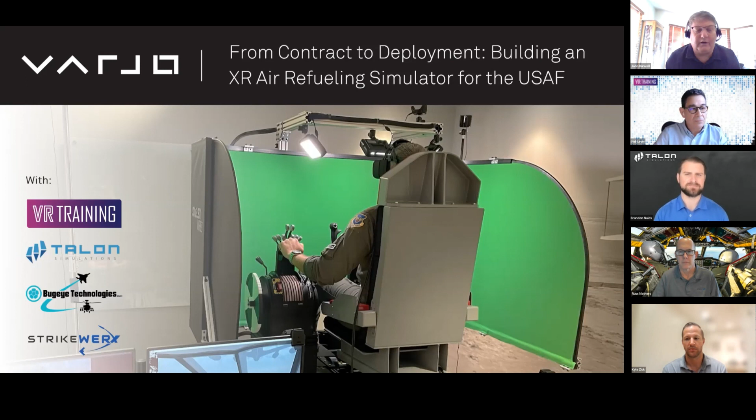A quick slide on Varjo. I think a lot of you are familiar with us, but for those that aren't, our focus at Varjo is really building enterprise class headsets that support human eye resolution, that support the ability to see details and objects at realistic visibility ranges within the headsets. We really have a focus on mixed reality solutions using video see-through technologies and a lot of software that we've developed that help to mix that video see-through technology with the virtual environment, the computer-generated content. I think you'll really see that today, how those tools were used and how it was implemented in building a real simulator. I think that's going to be the power of what you'll see today.

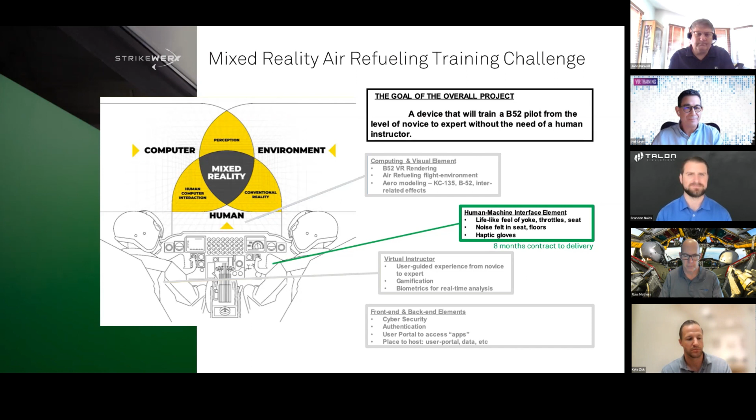Thanks, Russ. Challenges are like SBIRs, but SBIRs tend to be the effort of a single company. The problems and requirements of a challenge like this call for technical solutions that cover many, many disciplines.

As such, teaming is a super important part of the process. I knew that we couldn't architect a solution to the Strikewerx challenge without the input and effort from a team of small, like-minded companies. So I reached out to a few that I knew or had worked with before to help craft our solution. I was fortunate to be able to bring a great group together. They included Talon Simulations, Bugeye Technologies, Magic Bytes, Iris Dynamics, Silverdraft Computing, and of course, our host, Varjo.

As a small company, I know that I'll be going up against these large companies that may already be familiar to the sponsor with lots of capabilities. I've learned that we need to separate ourselves from the crowd by proposing unique solutions, usually outside the norm.

In this case, our solution was focused on providing a realistic experience and high fidelity simulation for the pilots. The hardware had to have the exact look and feel of the B-52 components. The simulator had to behave the same as the real B-52. Controls had to provide the same performance. And as a nod to the mixed reality requirements, we wanted to see real hands and arms on the throttle and yoke during the procedures.

So our focus was on these key elements: exact duplicates of the B-52 hardware, a multi-use platform and component engineering from Bugeye, electromagnetic actuators from Iris Dynamics that could provide smooth, powerful control loading, full motion 3-DOF platform from Talon, who were also responsible for much of the R&D and the actual assembly of the simulator in Orlando.

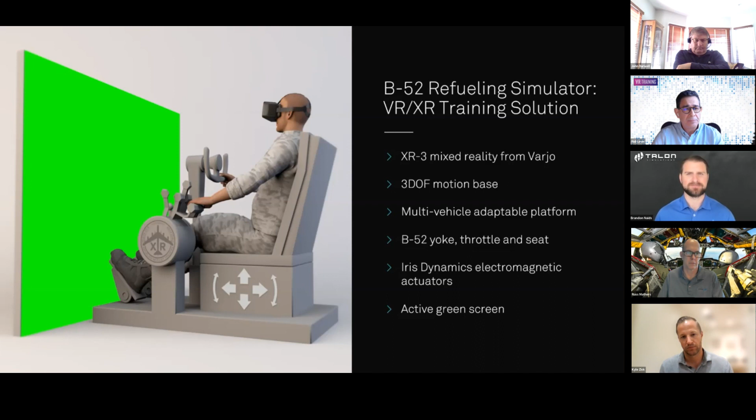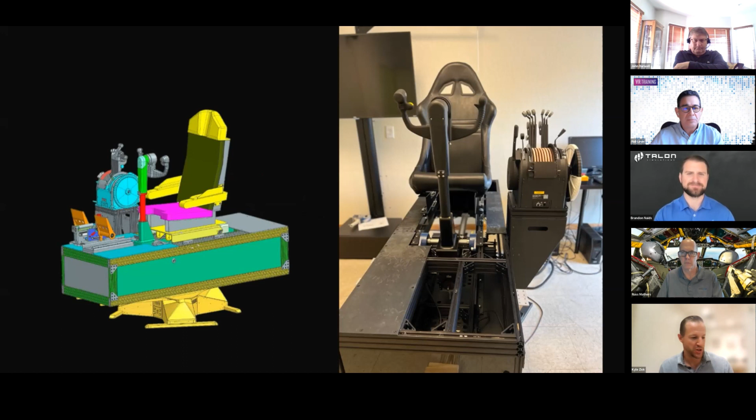Bugeye was already looped in from the start, but once we signed a contract, my first call was to Kyle. And I appreciate that call, Neil. Yeah, Neil called us and we started diving into this.

And you know, the biggest thing that we focused on up front in a project like this is to start with the pilots, start with the end users, try to pick their brains about what's important to them, what's going to make the training effective. And so we were lucky in this case because Russ and his team gave us great access to a great group of pilots that gave us all kinds of information.

And gathering information is really where we had to start. So between picking the brains of the pilots, going and getting in a B-52 and scanning, collecting more data in the B-52, and then also using some flight manuals - those are the main avenues for collecting data that we have at our disposal. There was initial talk about using an existing model, and really what we determined is that's just not adequate. You really need to combine all those data collection avenues together to get a full and accurate picture of what this simulator needs to do.

So when we sent a team of engineers down, we sent them with our laser scanner, a very high fidelity laser scanner, and they went in the cockpit and scanned every inch of that B-52 cockpit that they could to get accurate detail on every little piece.

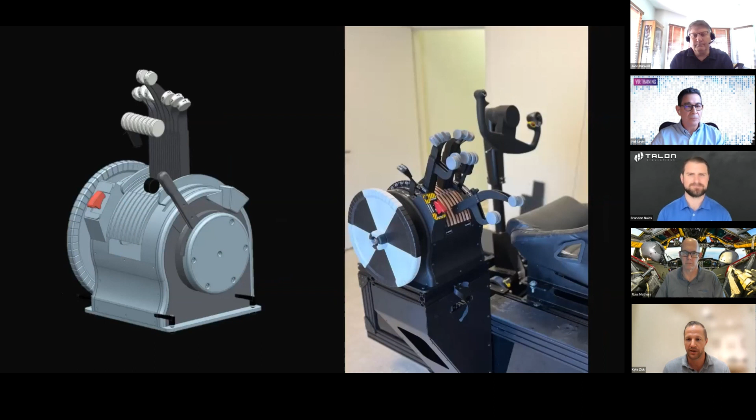To go into a detailed example, the throttle in particular is a really important piece, as was evident by the pilot interactions that we had up front. We had an interesting engineering challenge on the throttle where, in the real aircraft, there's 8 engines, 8 levers that you see there. But in the real aircraft, these levers are connected to cables, and those cables run hundreds of feet back to the back of the aircraft.

Those cables actually go out to the wings and control the flight surfaces. Trying to reverse engineer that system and put it into this package that you see here on the screen, which is basically a cubic foot, and trying to replicate those forces and the feel of that, again, is a very interesting engineering challenge.

We identified pretty early on that this complex throttle was going to be kind of the long pole in the tent for us from the hardware perspective. We were going to really have to focus on this and get it right, but also it was going to be a challenge from a scheduling standpoint.

Everybody's going to be wanting to get hardware in their hands and get it working. So we knew we had to move quickly, and our engineers ultimately did a great job getting those forces crammed into this little package that you see here, and a lot of the pilots, once they finally saw it, were just in awe of what we came up with on this throttle. So it ended up being a pretty good success story, but not without some hurdles along the way.

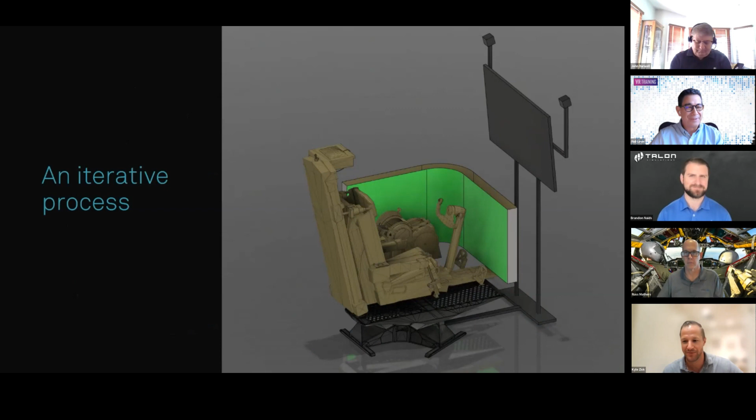Thanks, Kyle. Glad you answered the call.

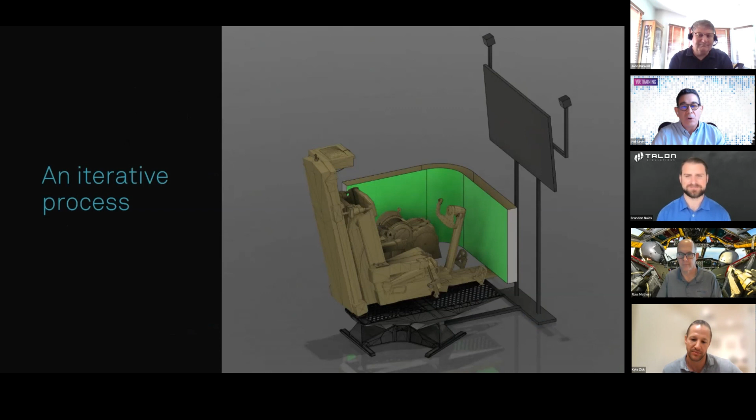This challenge began with 103 companies submitting solutions. Within a month, there was a down select to 25 companies, and then they wanted more detail from us at that point. The next round had a 10-minute video pitch, along with a 20-minute Q&A with the sponsors and the chief scientist from Global Strike.

And this was our first drawing that we supplied for that pitch. We signed our contract in early December, as Russ said, and we had 8 months to deliver the prototype. After we signed the contract, we began ordering all the new equipment, filling in the details of the effort, and planning the next steps. Once Bugeye's new scan was done, we had a VR cockpit that we could work with.

I love this picture from February 2nd. We're already 2 months into our build, and it's the start of our real R&D work. Jordan from Talon and Thomas from Magic Bytes began working on our initial prototype with COTS components. You can see here that we're using a rudimentary backlit screen, and the focus at this stage was building familiarity with the XR-3 headset to see hands and equipment inside the VR flight sim software.

Since this was the beginning of the project, we knew there was design and manufacturing of the hardware, and it would take a few months. So we focused on becoming familiar with the XR-3 and Varjo lab tools so we could understand what we could accomplish with the tools and the limitations within the flight simulator environment and chroma key.

With the goal of including the physical force feedback controls and your real hands within the virtual cockpit, we knew that we were going to have to use a green screen around the yoke and throttle, and we're going to learn how to create masks for that specific area with lab tools. And because there was no other interaction with other instruments for this application, we knew that our main focus was your hands and the yoke and throttle.

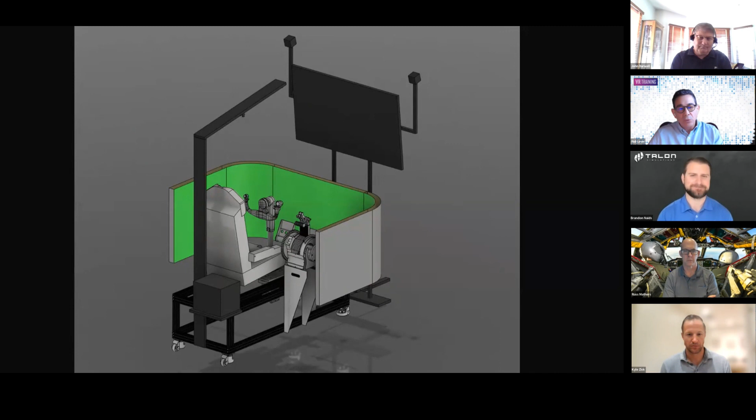The lighting array has now become this larger overhead panel because of all the lights we needed. We have 3 LED lights and 2 more spotlights to cover the lower side areas. We still don't have a solution about how they're going to be mounted yet. We're still gauging the size of the green screen. And so all those lights are a perfect example of over-engineering on our part, deliberate, or even delaying what our final solution was, until we move forward, later refining it on down the road.

By this point, we've received the bulk of the hardware from Bugeye, and we're ready to start stress testing our design.

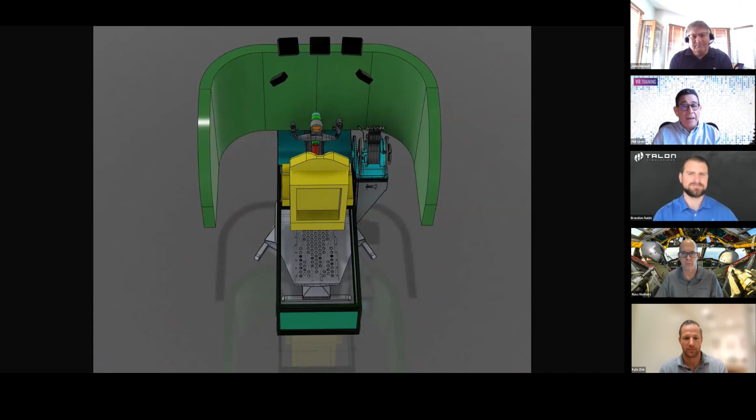One of the requirements of the challenge was that the simulator has to work for both the pilot and the co-pilot. From this drawing, you can see that our final positions for the lighting were above the pilot, but the boom construction still wasn't finalized.

The dimensions and shape of the green screen are final. The simulator has to work for both the pilot and the co-pilot with relocatable throttle quadrant, so the screen has to be of equal shape on both sides. And in this particular view, we're looking at the left-hand seat, the pilot.

And one of my questions to Russ, one of our questions to Russ, was: well, how are you going to get into the simulator at this point? And will 22 inches really make it work? And we told Neil that, yeah, 22 inches does work. You see behind me, the cockpit environment, you can see that throttle right there in the middle.

It's a common throttle used by both the pilot and co-pilot, so he's got to reconfigure it. But that 22 inches does allow the pilot who's used to getting in by grabbing a handle back here, right above the window, to grab that, stand on the seat cushion, and perform some gyrations to slide into that seat. So they're accustomed to that, and Neil's solution is satisfactory.

At this point, we decided to work with an outside engineer to evaluate materials for the screen and settled on a custom plastic screen that was light enough to be mounted on the motion platform.

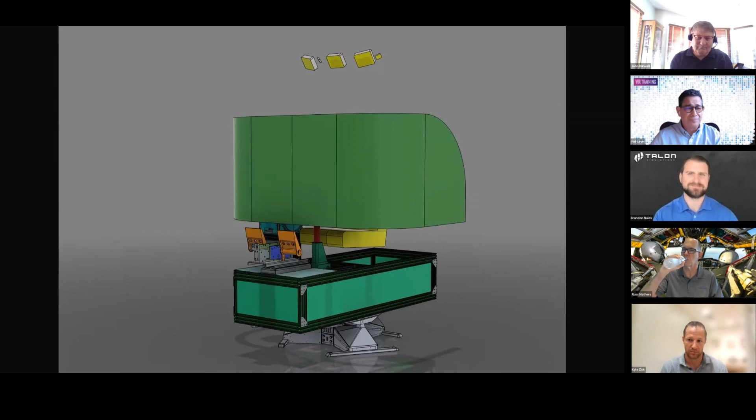We actually were kind of aware that might be a problem, and were able to make some quick design changes to the green screen frame. You've got the aluminum frame, then the green screen itself is acrylic with green screen fabric on it. We had to cut out this notch and ended up making plenty of space for it. So that's just one of the fun engineering challenges we encountered along the way.

The next step at this point was making sure we got all of the hardware integrated with the software. We had a software engineer on site helping with that. We had to make sure we got all of the inputs from the throttle and yoke communicating with the program, which was developed in Unity in this case, as well as the outputs.

Because you needed to have control of the actuators. For the yoke, it had a pitch, which was forward and back force, and roll left and right. So that needed to all be communicating properly, as well as the output of the motion profile to the platform. Those were all of the main components that we needed the software integration for.

We began fine-tuning more of the settings in Varjo Lab Tools for the green screen and making sure all of that was at least at a specific default area that we knew we might change on site, but at least gave us a good place to start based off of this lighting setup.

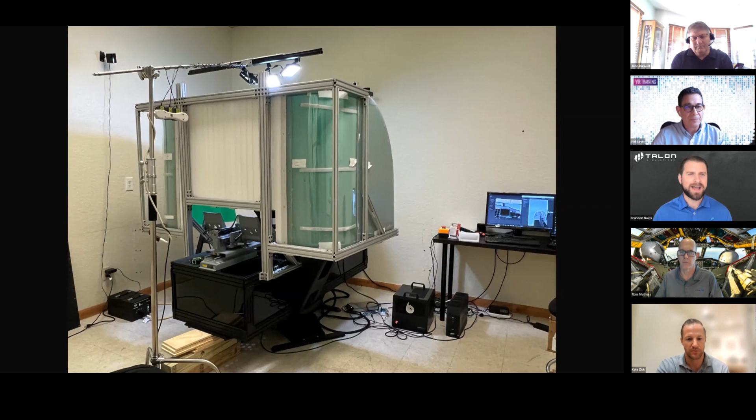Then, once everything was kind of working and tested, we were going to begin doing wire management. We wanted to leave open the cockpit where we were going to house everything until we knew it was all working. We were able to get things sorted out and make sure it's easy for maintenance and troubleshooting, which is one of the nice perks of the 80/20 cockpit.

So everything's housed below. We had a power supply for both of the electromagnetic actuators, and they use electricity to power the magnets, which make it a lot smoother of control loading. That was one of the benefits of using those, and what set us apart.

Such a critical aspect of air refueling is battling with those 35 to 40 pounds of force in the yoke. Those had a control board as well that needed to communicate the input and outputs. The yoke and throttle each had a needed power and data transfer to the computer.

And then even the seat had 3 actuators, because they are controlled just like in the real plane to move up and down, forward and back, and tilt forward and back.

As you see here, one of the other big aspects once we started were the armrests that we found cumbersome. We asked Russ, hey, this is a little cumbersome, what do you think, do we need these? I told them it's essential, because you've got to recreate that cumbersome feeling that the pilots have.

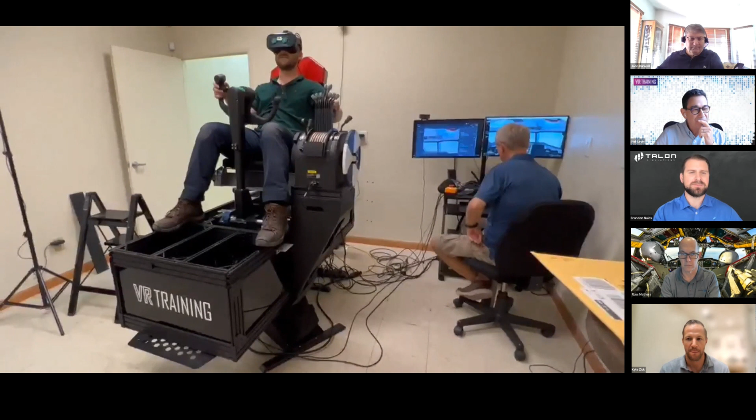So the motion communicates in real time with the Unity engine through a plugin that's processed through middleware software that translates that data into the 3 degrees of freedom of the motion. So you have pitch forward and back, roll left and right, and heave up and down. And we can actually tune those each independently of each other, depending on what forces are going to be stronger or less powerful in the aircraft.

We ended up tuning it to where we thought might be realistic, but then once we got some pilots on it, it got tuned down quite a bit more. Really your body just feels the onset acceleration cues, so you really just need a little bit of motion here and there, especially when you're air refueling, where your goal is to remain in steady level flight. So you're not moving around too much, but this was where we started, and we were able to fine tune all of that in real time with the pilots.

Our team did their share of QA in Orlando without the final screen. There was a lot of work going on as we integrated all the different components. But now it's time for the last set of testing.

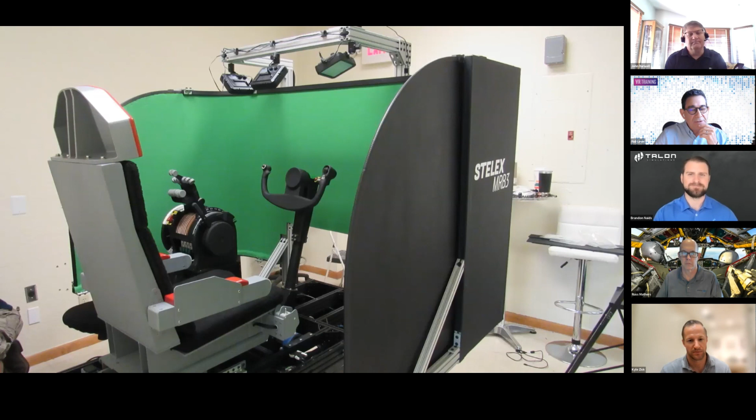This is July 26th, we're 7 months in. We're almost done, just days left to go before we have to pack it all up. The final screen is finally mounted on the 80/20 aluminum frame, and it's covered in a black skin. That same frame supports the light array, now down to only 3 lights, and strong enough to serve as the handhold for the pilots entering the simulator. We've got less than a week at this point before the simulator has to ship out.

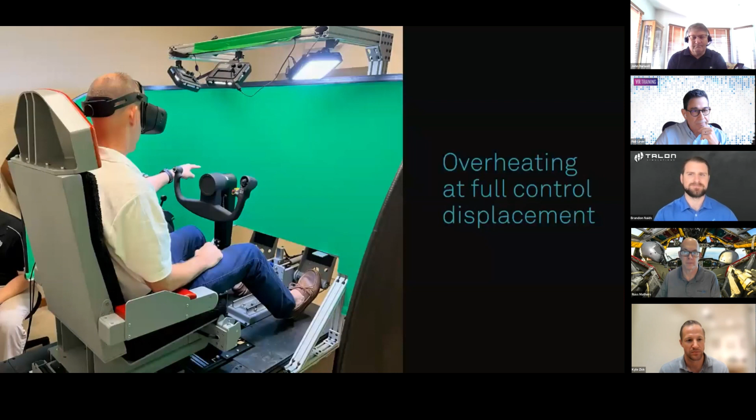And so the first day with Russ testing resulted in an issue of overheating of the actuators. We found that during normal air refueling, it's possible to end up holding the yoke at full rotation for a period of time. That led the actuators to be holding that amount of force, up to 40 pounds, longer than expected. And it overheated the actuators to a point that they faulted.

They cut off power to protect the actuators. We didn't really expect to max them out to that level, but we knew that we could apply active cooling to them. If you cool them down, we could increase that continuous power output 3 times compared to without the cooling. We were able to grab a fan that we had in our warehouse, the ones we actually use for our race car and roller coaster simulators to blow wind into your face, and wired it into one of the power supplies. Got some duct work from Home Depot, and it was able to be resolved.

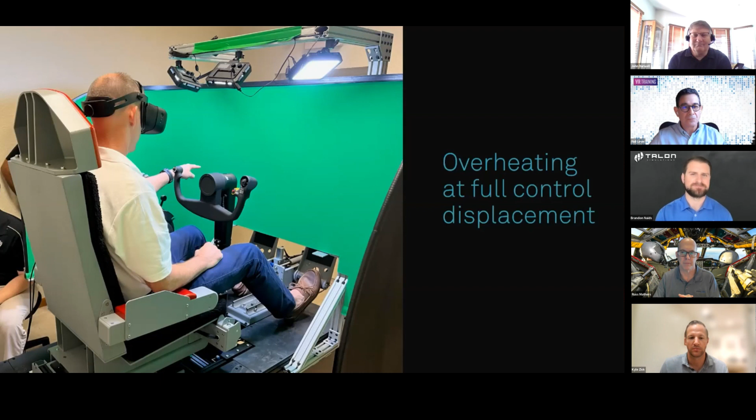Thanks, Russ. This is a short video of Blade flying the next day. Having the pilots in for these two days was key. We would never have been able to tweak the various motion parameters and adjust everything without their presence. Blade was able to prove that we had a workable solution to the overheating problem at this point. We also learned that we didn't really fly the B-52 like a pilot did.

Now that we've completed our testing in Orlando and run out of time, we had to ship the simulator finally to the Cyber Innovation Center. And now we're getting ready for the big event.

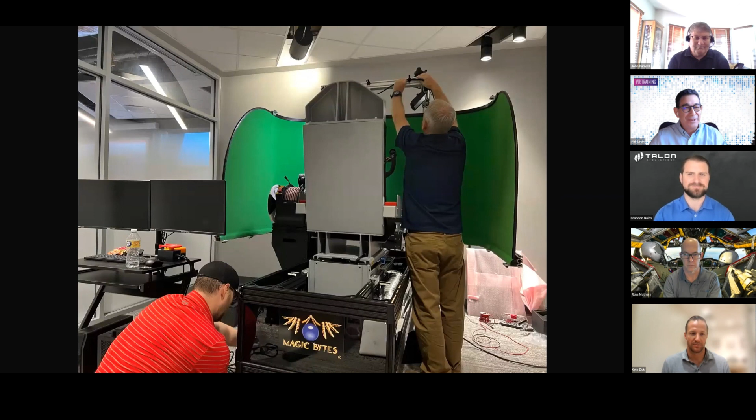The official fly-off was Wednesday and Thursday, but we shipped everything the week before and got it to the Cyber Innovation Center in Bossier City outside of Barksdale early in the week. The simulator was shipped in two custom crates, reassembled, tested, and calibrated on Monday and Tuesday. This was a demo space that they allocated to us.

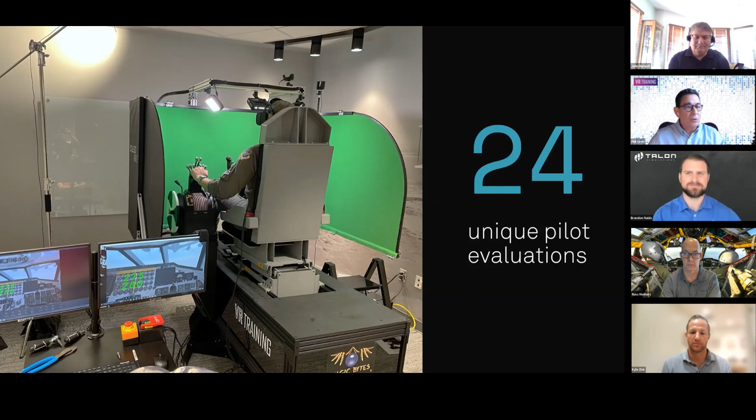With the official fly-off on Wednesday and Thursday at the Cyber Innovation Center, the Strikewerx team behind the event did an incredible job - incredibly well run, executed to a T. The pilots came into our demo space in teams of two. One pilot would serve as an observer instructor while the other would fly, then they would switch places. They'd been briefed in advance and instructed on how to judge the event. We also had a number of distinguished visitors, senior members of the AFRL, and guests from other units, all in attendance as well.

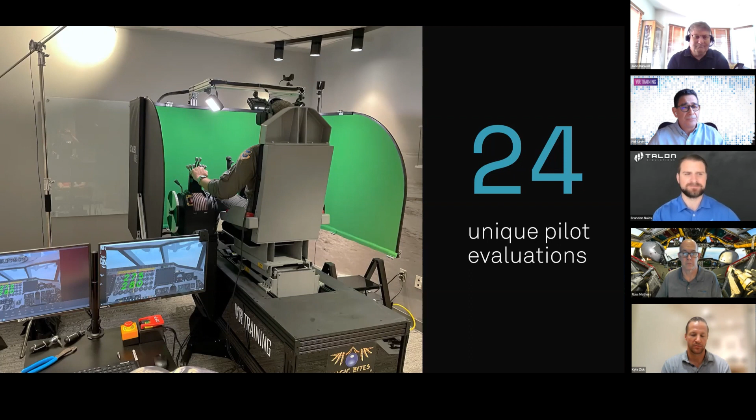Our simulator was finished up and shipped on Friday to Barksdale, and a week later the B-52 students were actually using it. It was an incredible event.

It really was. And I'd like to thank Russ and his Strikewerx team for putting on such a well-executed challenge. And I'd like to also thank our four pilot instructor reservists who served as our SMEs during the event and helped guide us during the project: Majors Budgeon, Tackett, Wolf, and Lieutenant Colonel Carroll.

Thanks to Cassie and John from the Varjo team for hosting this webinar, and Russ, Brandon, and Kyle for their valuable input. We actually filed three patent applications for this design and certainly look forward to building more of them. And here's a wonderful video of the fly-off with great testimonials from the pilots about what they experienced.

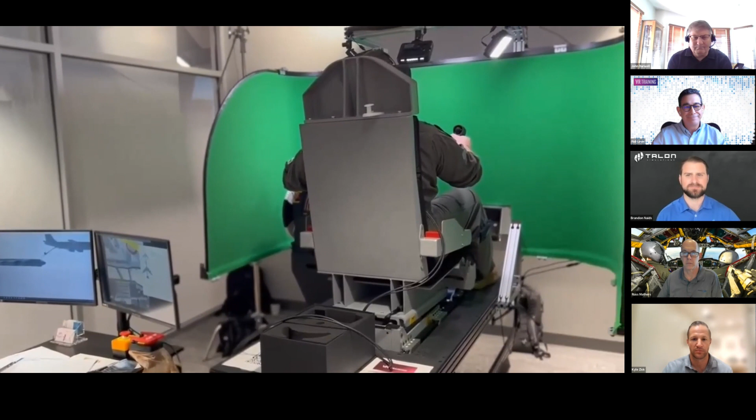Overall experience is I wish we had that when I was coming up. Having something that I can go sit behind and kind of play around with and figure out my tendencies and how the aircraft might react, especially with another aircraft in front of me, on the ground where it's safe, would be great. In the VR training that we have here, you get a chance to set the conditions so I can build good habits correctly now on the ground.

What they have right now is the closest thing that we can get. It'll be great for the 11th Bomb Squadron to have initial qual, seeing how to actually fly before getting into the jet, and being able to learn tips and techniques - saves money in the long run for training overall.

I think these simulators are a great tool. I just finished my initial qual training, so I definitely wish I had this, because air refueling is one of the hardest challenges for new pilots coming into the B-52. Having the ability to practice and train in that simulated environment, where conditions are stable and I'm able to focus on what I'm doing to influence that, is really, really helpful.

Sometimes it's even little things, like getting used to the director lights. When you're a first-time student going up there, sometimes you get yourself backwards and do the opposite of what you should have done, and a lot of those little brain tweaks can be worked out in the VR sim. It was definitely a great experience today.

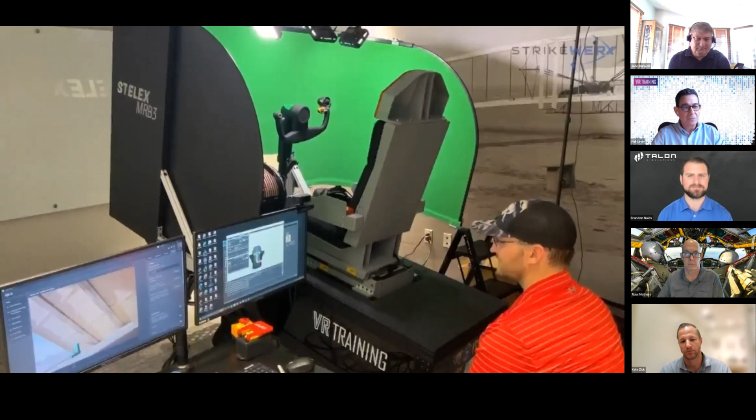Very impressive to see the technology that's been presented to us today. Air refueling is definitely a challenge for us. This just provides another tool for us to actually train to the things that we actually do. I see myself, if this comes to our squadron or to the FTU, using it more often than not.

Well, I've heard it, and I can see it now, that air refueling is really difficult. If these sims are available during our FTU, then I'll definitely be using them.

Thank you very much, everyone, for the great presentations and outline. I'm going to turn now to Russ and ask him for his perspective on the project and thoughts on how it went for you from an Air Force perspective.

We couldn't have been happier. This is a great project that we had. The Air Force was very happy with it. Those 24 pilots that came in and tested it, none of them really had very much AR or VR experience. Most of them were more senior pilots, not your young 20, 23, 24-year-old brand new pilots out of pilot training who've grown up with VR and maybe some gaming experience. These are 40-year-old pilots who aren't gamers and don't have VR experience, but they really did enjoy the experience in the simulator. And I've used other sims that I can't say that for.